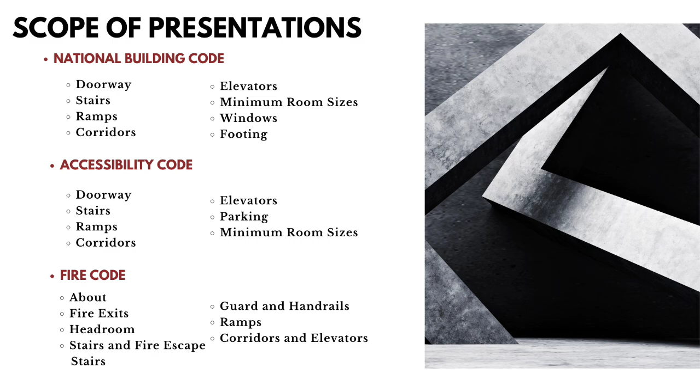Good day, Ms. Imadil. I am Nathan Matthew Martinez, here to discuss the National Building Code of the Philippines, which was promulgated in 1977 by our President Ferdinand Marcos, and then later took effect on April 30, 2005.

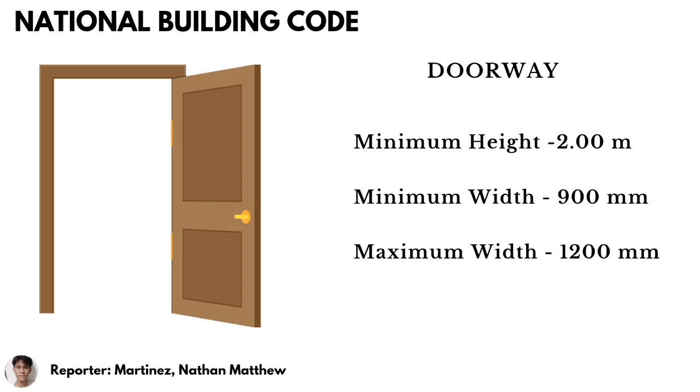Starting with the doorways, the 2-meter head height prevents head injuries, while the width of 900 to 1,200 mm allows for easy passage, including for people in wheelchairs.

Next are the stairs. Max riser is 200 millimeters. Minimum tread is 250 millimeters for safe climbing. The width depends on the occupant load. If it is greater than 50, the width should be 1.10 meters. If less than or equal to 50, it's 0.90 meters. If less than 10, it can be 0.75 meters.

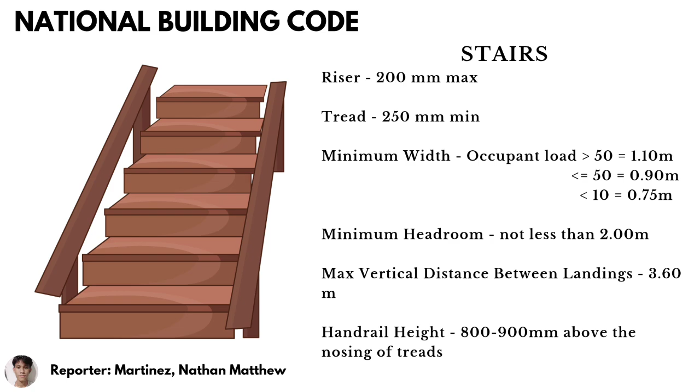The minimum headroom should not be less than 2 meters. The maximum vertical distance between landings should be 3.60 meters, and the handrail height is 800 to 900 millimeters above the nosing of treads to prevent falls.

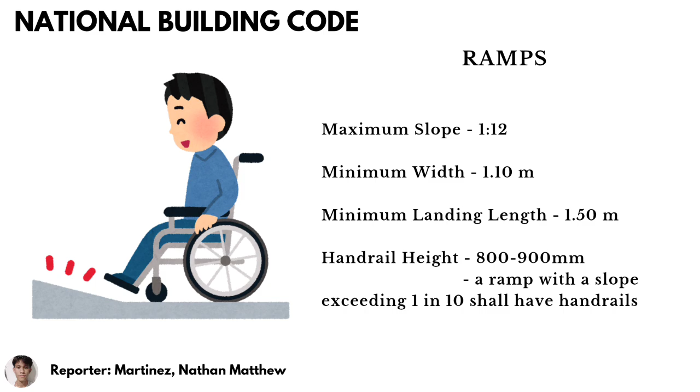Next, ramps. They should have a max slope of 1:12 for wheelchair accessibility, minimum width of 1.10 meters, minimum landing length of 1.50 meters, handrail height of 800 to 900 millimeters, and additionally, a ramp with a slope exceeding 1:10 shall have handrails. Corridors: minimum width of 1.10 meters for easy movement and easy passage.

Elevators. In location, it should have 4 elevators maximum in a single hoistway, and 1 passenger elevator for apartments and condominiums 5 stories or higher.

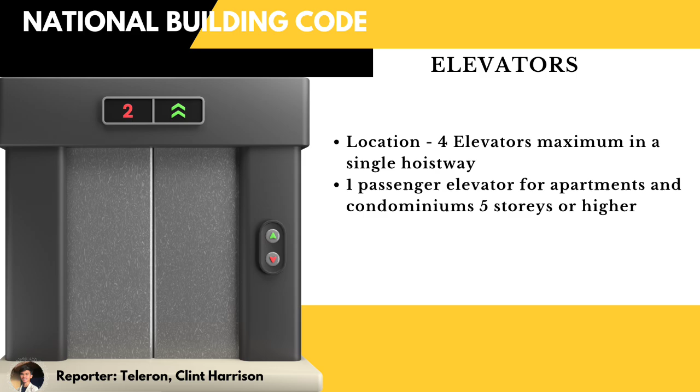Next is minimum room sizes. A human habitation must have a minimum area of 6 square meters and a minimum dimension of 2 meters, while kitchen should have a minimum area of 3 square meters and a minimum dimension of 1.50 meters, while toilet and bath should have a minimum area of 1.20 square meters and a minimum dimension of 0.90 meters.

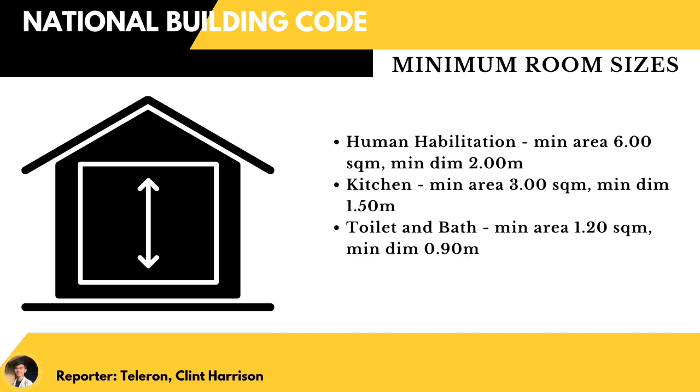Next is windows. The clear opening width should have a minimum of 0.82 meters, a height of 1 meter, and the bottom of the opening must have a maximum of 0.82 meters. The required eaves must not be less than 750 millimeters from the side and rear property lines.

Rooms without artificial ventilation must have windows with a free area of at least 10% of the floor area, but not less than 1 square meter.

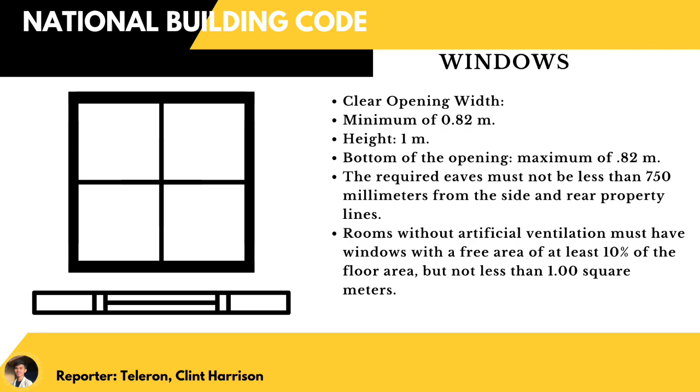Lastly is footing. It should have support dwelling load, a thickness of 250 millimeters, and a depth of 600 millimeters below ground surface. Good day, I am Eugene Kamay, and now let's talk about the Accessibility Code.

Batas Pambansa Number 344 is an act to enhance the mobility of disabled persons by requiring certain buildings, institutions, establishments, and public utilities to install facilities and other devices.

Now, let's talk about doorway, with a minimum height of 2 meters to ensure clearance for people of varying heights. Next is minimum width with 800 millimeters to allow enough space for individuals using wheelchairs or mobility aids to pass through. And maximum width with 2 meters prevents excessively wide doors that may be difficult to open, especially for persons with disabilities.

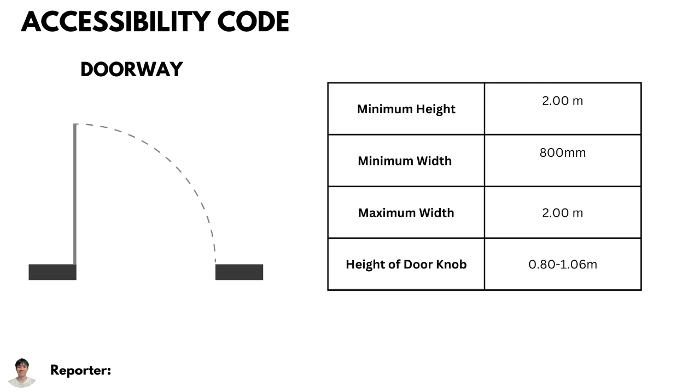And lastly, the height of doorknob, which ranges from 0.8 meters to 1.06 meters to ensure that door handles are within reach for both standing individuals and wheelchair users.

Next, we have stairs. With a riser of 0.15 meters maximum, limit step height to reduce strains on users, especially the elderly and those with mobility impairments.

Next is tread, with 0.30 meters minimum, ensures a stable foothold to prevent slipping or tripping. And minimum width with 1.5 meters provides ample space for safe movement, including for those using canes or guiding dogs.

And then, maximum vertical distance between landings with 3 meters apart prevents excessively long stair flights, reducing physical strain. And lastly, the handrail height with 0.70 meters to 0.90 meters with 0.30 meters long extension provides necessary support for stability, and extensions assist users in transitioning between stairs and landings.

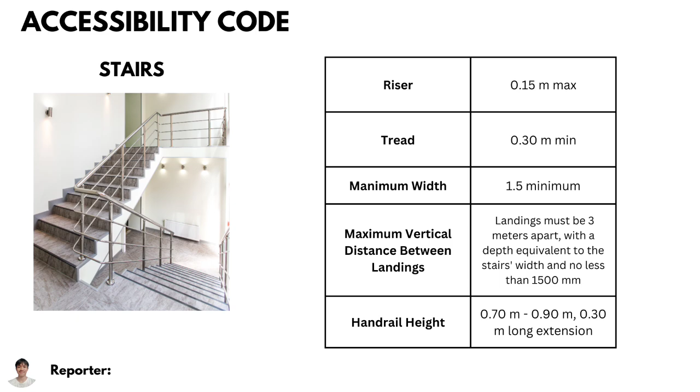And then we have ramps, with a maximum slope of 1:12 ensures that ramps are not too steep, making them accessible for wheelchair users, and minimum width with 1.2 meters allows enough space for safe wheelchair maneuvering.

And minimum landing length with 1.5 meters provides a resting area and allows for direction changes. Then, distance between landings with 6 meters horizontal distance ensures that ramps are not too long without breaks, making them easier to use.

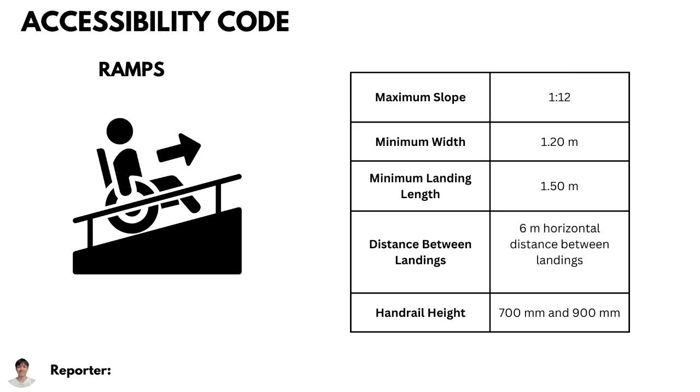And lastly, the handrail height with 700 millimeters and 900 millimeters provides grip support and appropriate levels for both standing users and wheelchair users. Now, for corridors.

It should have a minimum width of 1.20 meters. And next is the elevators. Elevators location should be not more than 30 meters from the entrance, a depth of 1.14 meters, a width of 1.2 meters, and a clear opening of 0.9 meters.

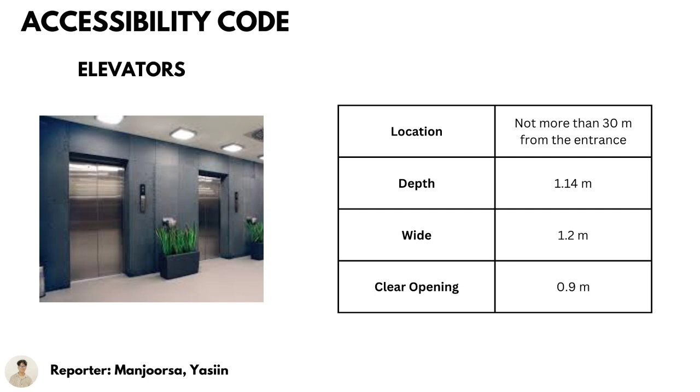Next is the parking. The parking space should have a width of 3.70 meters, a length of 5 meters. For the parking slots, 1 to 25 parking slots should have 1 dedicated accessible parking, 26 to 50 should have 2 accessible parking slots, 51 to 75 should have 3 accessible parking slots, and so on.

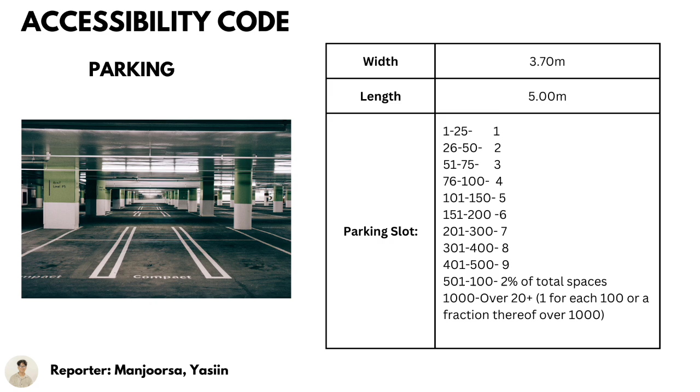And now for toilet and bath. Toilet and bath should be a 1.7 by 1.8 meters minimum dimension, and it should have a grab bar for public use for people who have unstable or stability issues, and a minimum of 1 accessible water closet on each floor level. Max height of water closet should be 450 millimeters.

Maximum height of lavatory should be 800 millimeters with a knee recess of 600 to 700 millimeters. And workstation access aisle should be 0.92 meters minimum wide.

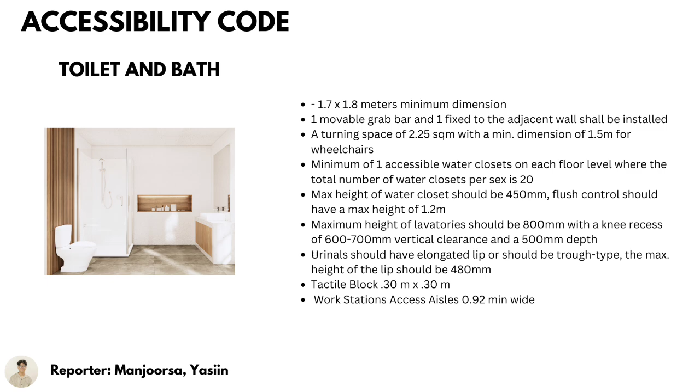That's all. So now let's move on for the last code law, which is the fire code. This will be discussed by me, Jordan Baumamak, and Godriel Selvin Libatan.

Begun and held in Metro Manila on Monday, the 23rd day of July 2007. The revised Fire Code of the Philippines, Republic Act 9514, enacted, repeals Presidential Decree 1185. This policy ensures public safety and promotes economic development by preventing and suppressing destructive fires.

Hello, I'm Godriel Selvin Libatan, and for this slide, I'll be explaining fire exits. There shall be at least 2 exits available from auxiliary stage spaces. One should be available within a 23-meter distance, and the travel distance for exits shall not exceed 46 meters in any spaces.

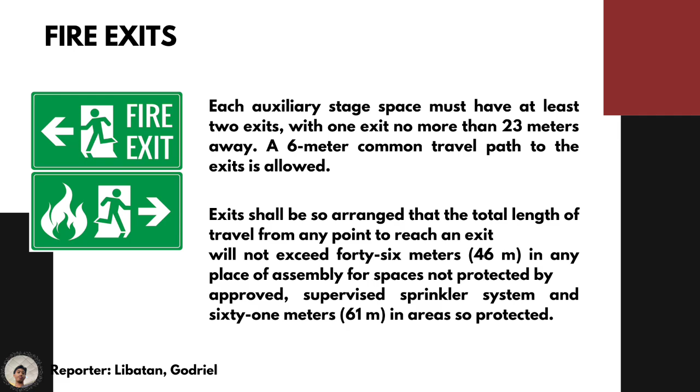The main exit shall have enough width to sustain at least half the occupant load, and the other exits have 2/3 of the occupant load served by that level.

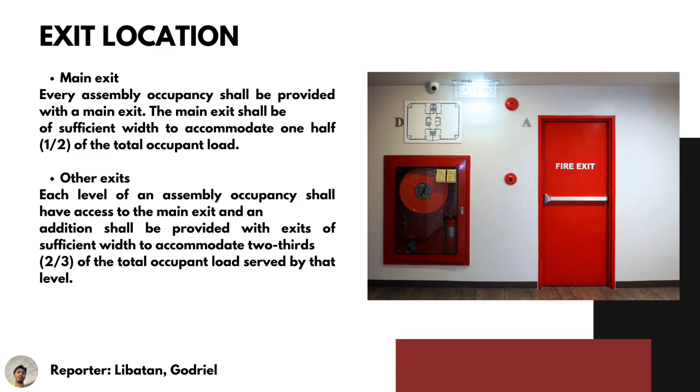Next is the headrooms or means of egress. Headroom is the amount of space below a roof, ceiling, or bridge, or below the top of something. We have here the minimum height of 2 meters, minimum width of 900 millimeters, and maximum width of 1.12 meters.

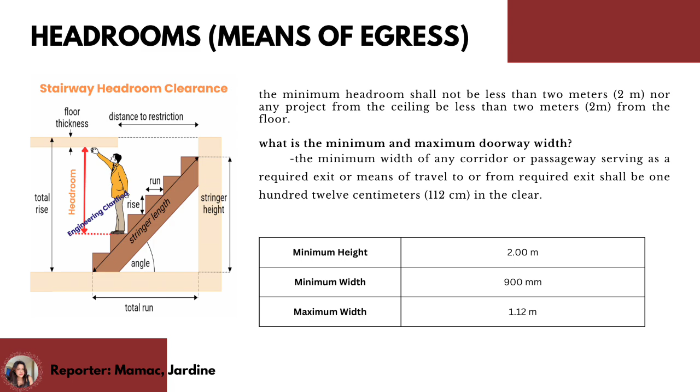Now moving on to the fire escape stairs. The width should be 0.60 meters minimum. The horizontal dimension of any landing or platform should be 0.60 meters minimum. And the rise and run are 0.23 meters maximum.

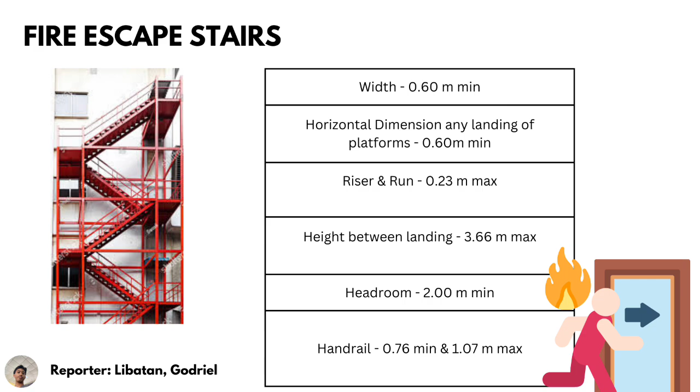The height between landings is 3.66 meters maximum. The headroom is a minimum of 2.0 meters. And the handrails are 0.76 meters minimum and 1.07 meters maximum.

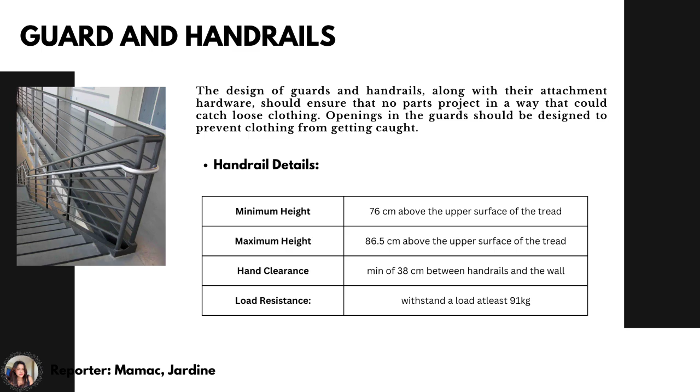Let's proceed with guard and handrails. Handrails help prevent falls on stairs or ramps, while guards prevent falls over open sides of walking surfaces. The handrail details: minimum height of 76 centimeters, maximum height of 86.5 centimeters, hand clearance minimum of 38 centimeters, and load resistance at least 91 kilograms.

Next is guard details. Minimum height of 106 centimeters, minimum height for interior balconies and mezzanines 91 centimeters, intermediate rails less than or equal to 25.5 centimeters, vertical balusters less than or equal to 15.25 centimeters apart, lower part on stairs more than or equal to 76 millimeters, and on level areas more than or equal to 15.25 centimeters.

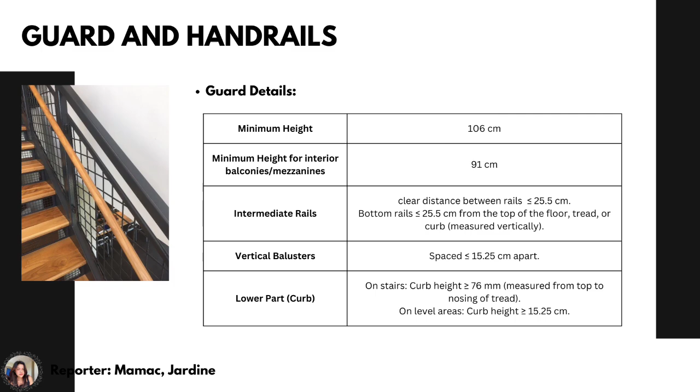Moving on to ramps, the max slope should be 1 in 12, the minimum width should be 1.12 meters, the max cross slope should be 1 in 48. For the different classes, Class A should have a maximum width of 112 centimeters with no limit on height between landings, while Class B should have a maximum width of 76 centimeters and a maximum height between landings of 3.66 meters.

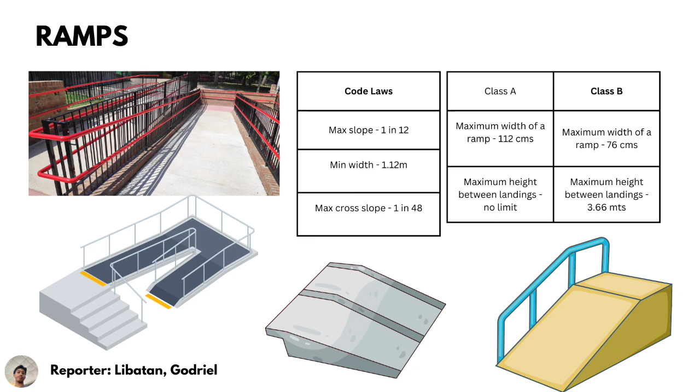Next with ramps is corridors. We have here a minimum width of 1,500 to 1,800 millimeters, clearance of 900 millimeters minimum, turnabout spaces 1,800 by 1,800 millimeters, maximum of 12,000 millimeters, every dead-end corridor.

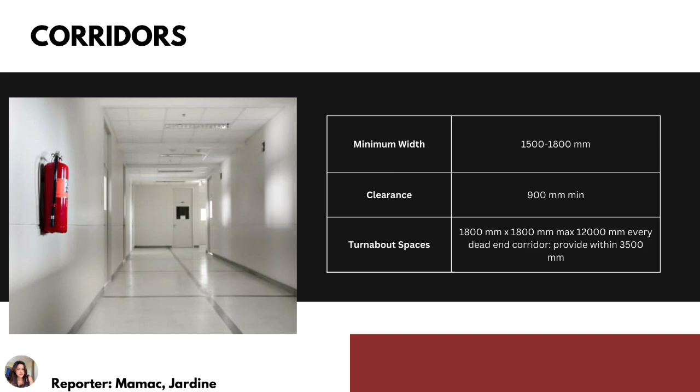Provide within 3,500 millimeters. Now moving on to the last part of our discussion, which is the elevators. According to section 10.2.75, elevator installation shall be in accordance with the latest edition of PMEC, and all new elevators shall conform to the Firefighters Emergency Operation Requirements for ASME A17.1.

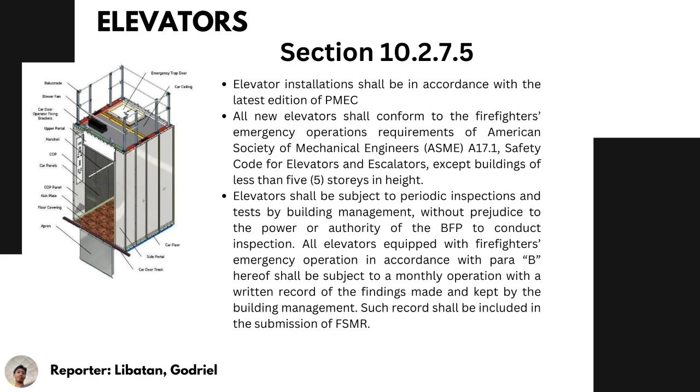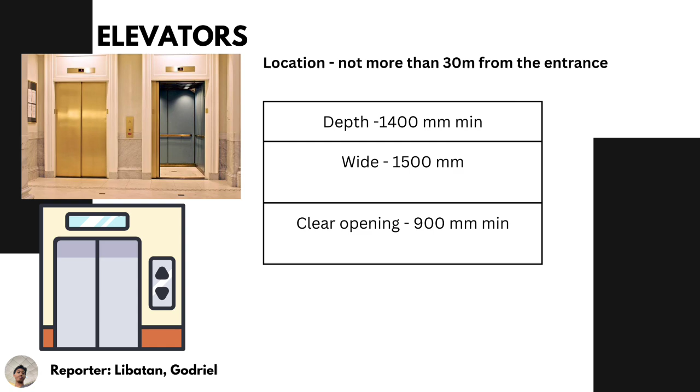Elevators shall be subjected to periodic inspections and tests by building management, and its location shall not be more than 30 meters from the entrance. Its depth should have a minimum of 1,400 millimeters, the width should have 1,500 millimeters, and the clear opening should have 900 millimeters. And that is all. Thank you.